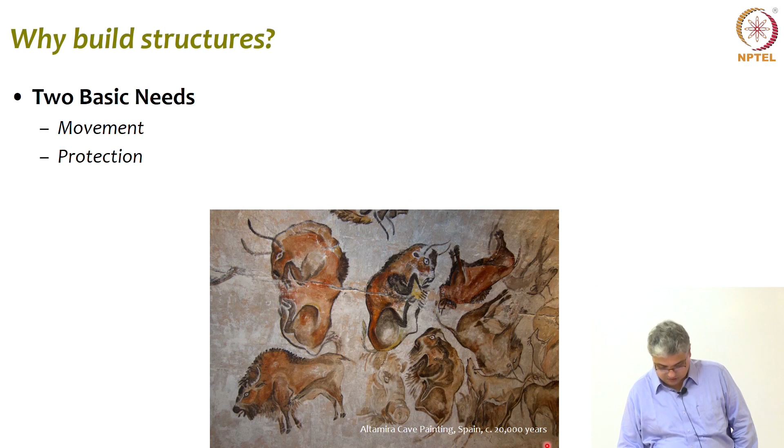So the first thing was for movement and protection. But as we progressed as a race, there were other requirements also, and we started building for different purposes. Sometimes it just boiled down to creating something so beautiful that it catches everybody's imagination and you just leave a mark. That itself is a great achievement of the human race.

We were able to do that by constructing these beautiful structures, beautiful not only in terms of the architecture of it, but also in terms of the science behind it. And we'll see why people say structural engineering is a combination of art and science.

So you just build one of these in your lifetime and you will be famous and known forever. The question is, are you willing to do that?

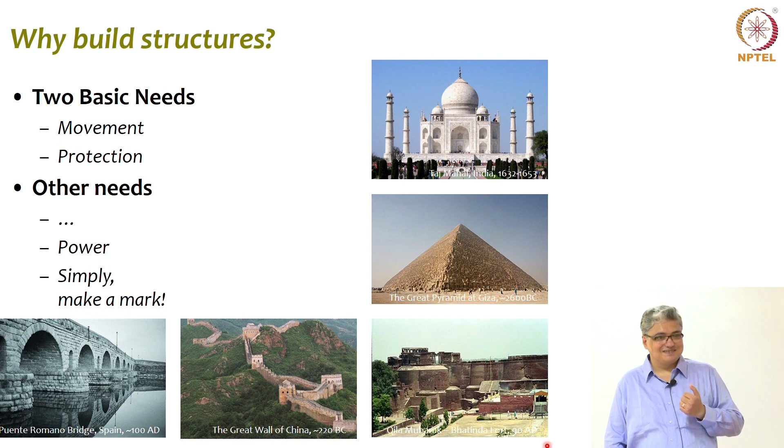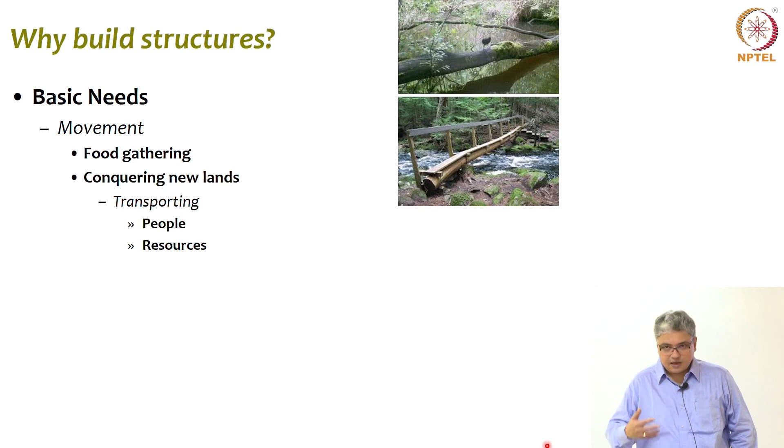If you really look at it, it's very simple. We have seen fallen logs and branches, and not only we but even other animals have used them as simple bridges. Taking inspiration from that, today we have managed to build massive, massive bridges.

So taking a clue from nature, we managed to do such massive and wonderful things. What was the whole purpose? The purpose is to come out and explore the world, to be able to move around, to move people and resources. First, the option was to hunt and get food, and slowly move to newer places looking for newer resources, which eventually led to conquering new lands for resources and for people. So movement or transportation of people and resources was important for us.

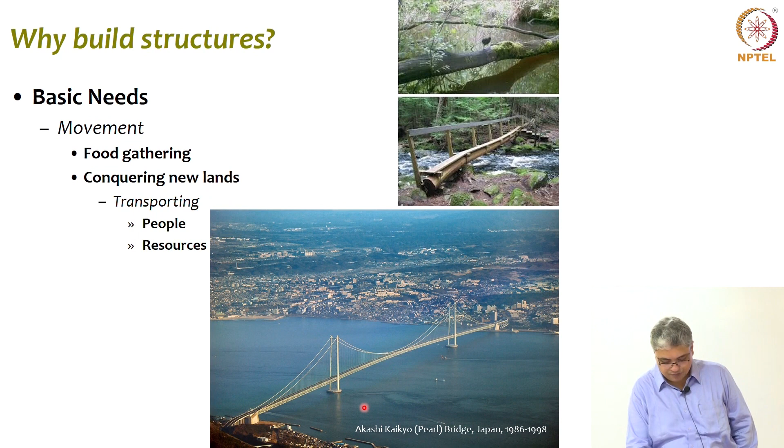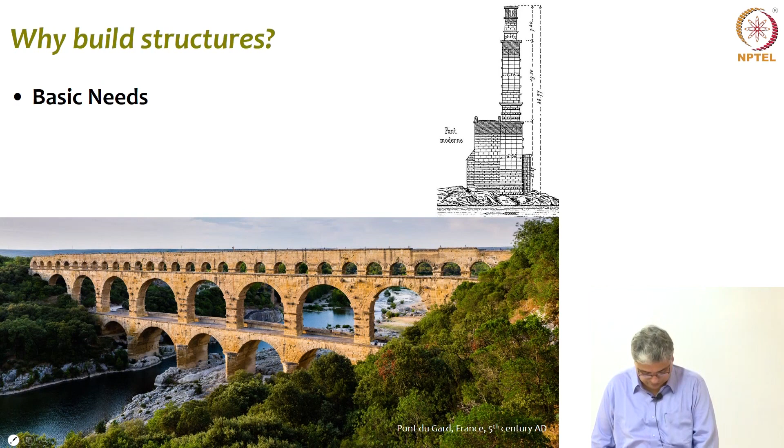Just look at this. Centuries old structures still standing, beautiful. You just look at it and feel good that we as a race have done something beautiful in this world. That feeling is also important. So another example of beautiful Roman architecture and construction.

In modern days, we took it one step forward, making aqueducts which can also support ferries. It's not just transporting water, but actually transporting people also. So what it shows is that we are slowly expanding our domain, thinking bigger and bigger, and as we do that, we are capable of executing such dreams and making them reality.

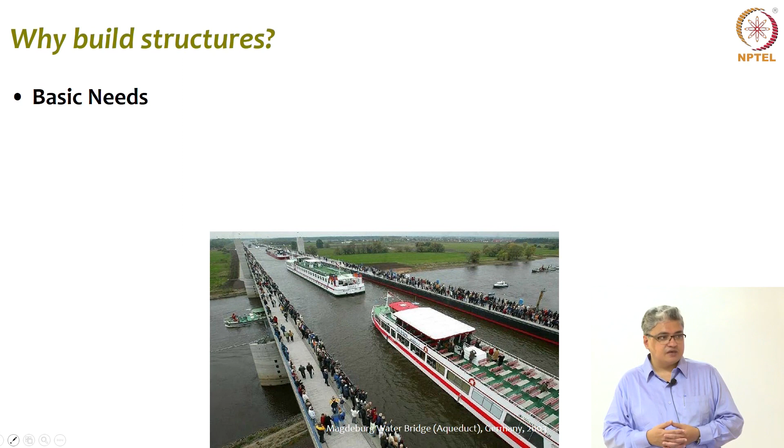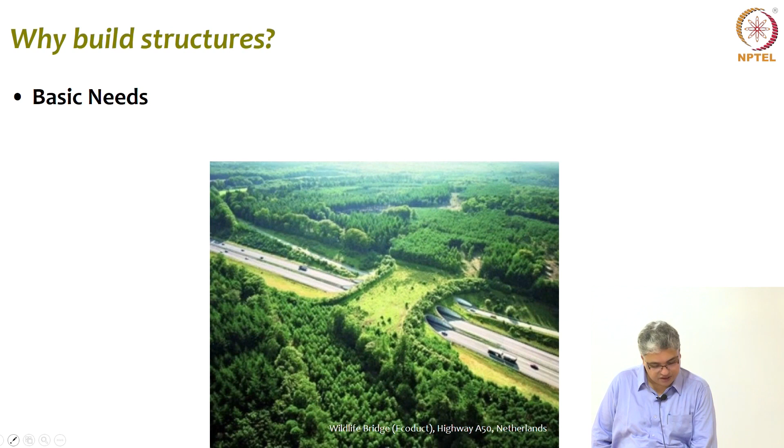Talking of protection, obviously the first thing that comes to mind is we need protection from nature, right? The natural hazards. And today, of course, we have natural as well as man-made hazards also.

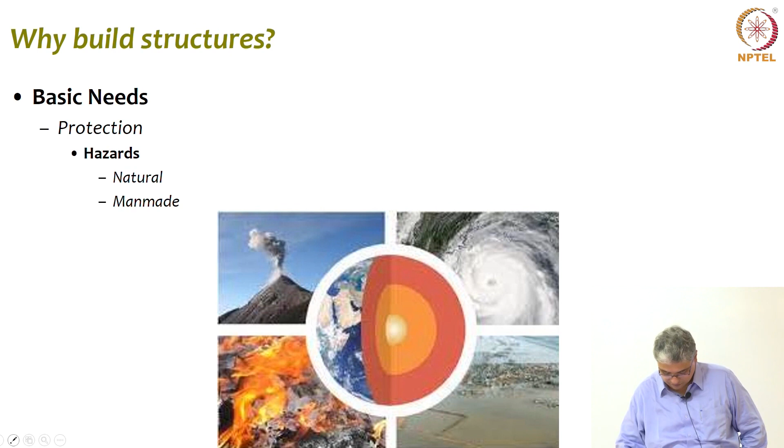So what are natural hazards? Things like floods, cyclones, earthquakes, droughts—these are natural hazards. And today we have a lot of man-made hazards too, starting from pollution to even arson and so on.

So if you really look at it, I'll touch upon some of the very important ones, which are cyclonic occurrences. You see that the whole coastline of India is actually prone to cyclones, and the eastern coast is more prone than the western coast, and we'll see some data.

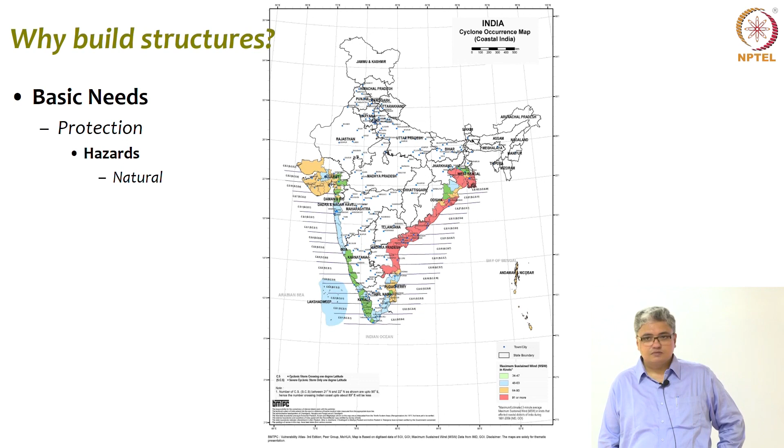So when we build structures, we have to ensure that whatever we build can withstand these natural events and protect ourselves.

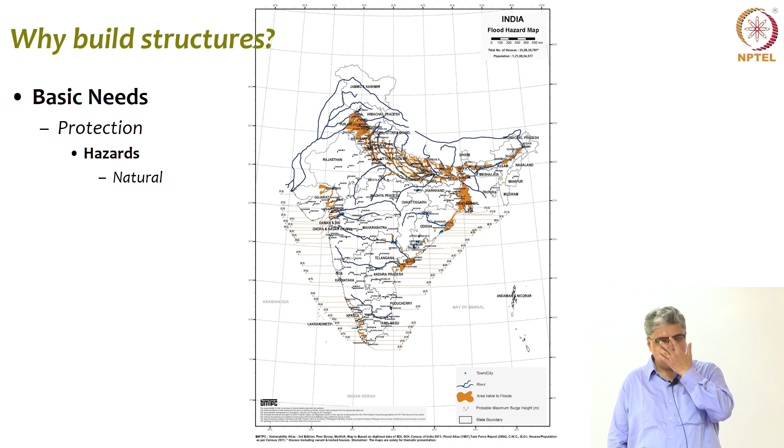Flood is another natural hazard, and every year we see these reports—on one side we see drought, and on the other side we see flood going on, and then earthquakes.

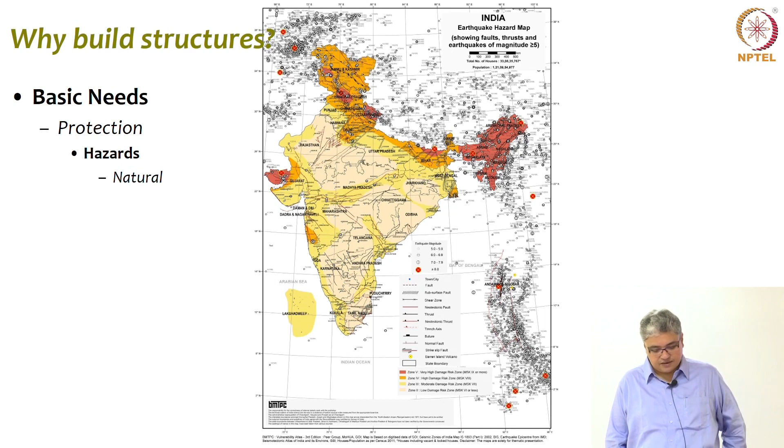So we have earthquakes occurring all over India, and particularly the whole Himalayan belt is very, very prone to earthquakes. Just to summarize this, if you visit the website of NDMA—what is NDMA?

It is the National Disaster Management Authority under the Government of India. They list out a lot of natural and man-made hazards. Just to give you an idea, India as a country has about 60% of landmass prone to earthquakes of moderate to high intensity, about 12% of land prone to floods and river erosion, and about 76% of the coastline prone to cyclones and tsunamis.

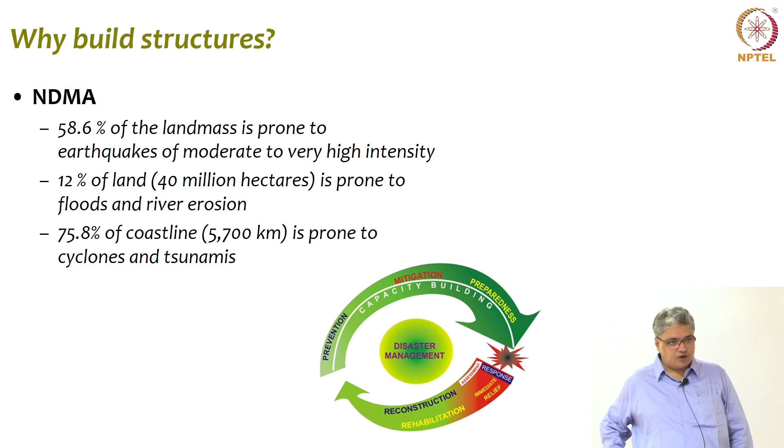So what we see is we have to do more than natural and normal things as civil engineers, as structural engineers, to ensure safety of ourselves and the structures we build in a country like India. And so we need good structural engineers—we need to understand all these effects, and then build structures accordingly.

So going back, we started housing ourselves in caves which were natural, and then we started building caves. This is a very interesting example—it's a very soft sandstone. So they said that whoever could not afford a house would go and create a burrow in this ridge and then have a house for himself and his family.

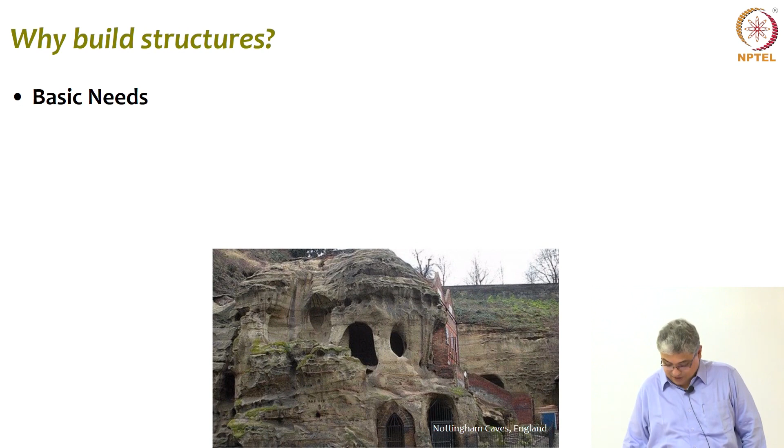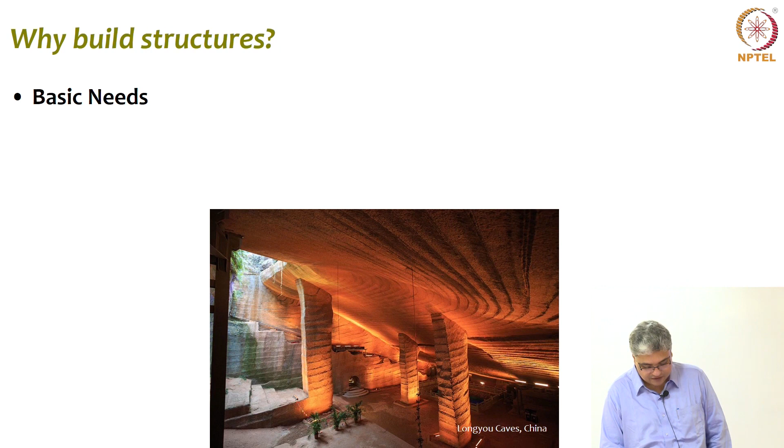But then look at this—it's a very interesting example, almost 2000-year-old, a man-made cave. So we built such things for our protection from natural hazards, and this was hidden but then found recently, discovered very, very recently.

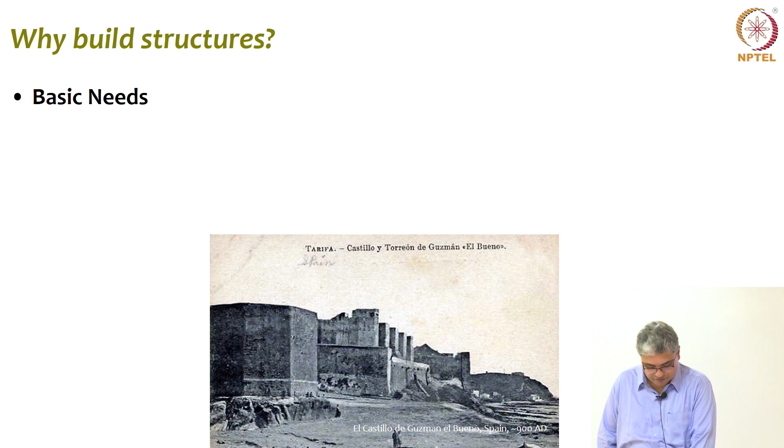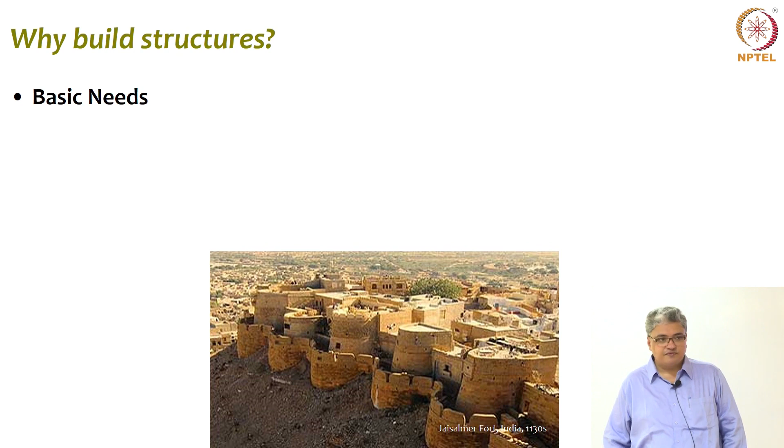So in terms of protection, in terms of building houses and all, of course we started with smaller things and then we aspired more and built more. One of the very early fortresses or forts you see back here in India is the beautiful Jaisalmer fort. Those who have visited will know—we created these very massive, beautiful structures. But then that was not all—we aspired to do more.

And there came social and cultural, and you can add religious and so on issues to it. And we build structures like this.

Not to talk about the great pyramids in Egypt, but also all over the world there are pyramids. But look at this picture. I like this picture for one simple reason: look at the creativity. The creativity that we saw in that first cave painting is still evident here. If you see here, this is the face of a serpent, and on the March equinox, the sun falls in such a way that it creates a shadow. So starting from here, you see the serpent effect, and it happens on that particular day. So structural engineering is not just building something, but it's building something beautiful also.

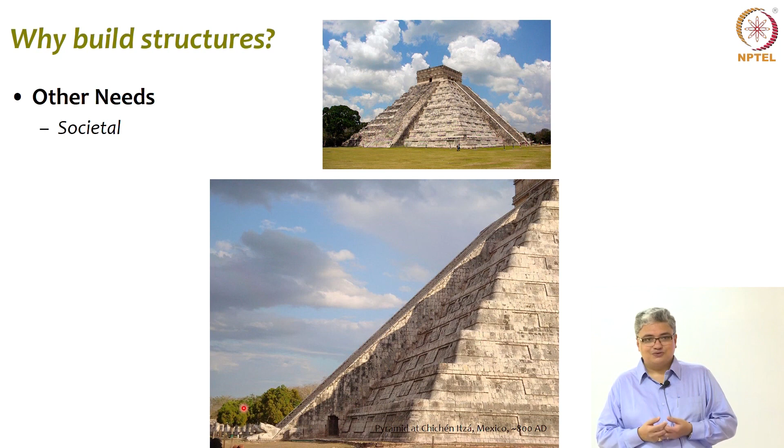So if that was built with stones, this famous temple is built by cutting away stones. It's one of the largest rock cut temples in India. Of course it took a lot of time, a lot of patience, but if you do things calmly, peacefully, all it tells us is that we can do great things.

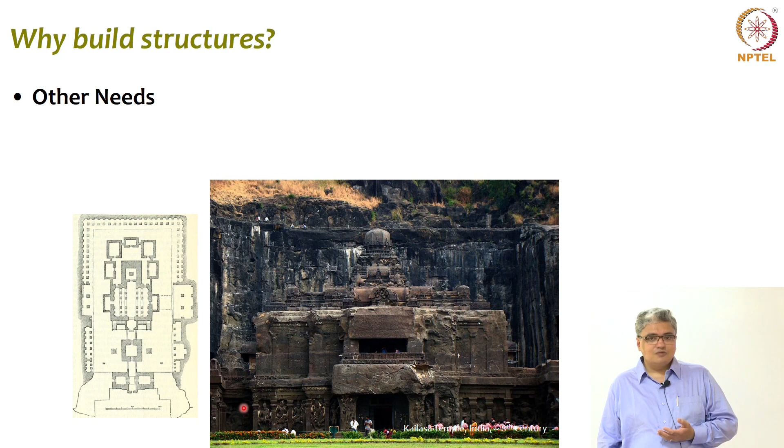One of the tallest temples in India, and when it was built, it was definitely one of the tallest in at least this part of the world. But the beauty is that they had put an 80-ton or so single stone at the top. How did they do that?

Each of these structures that I'm trying to show has a history of its own, and you can actually spend your whole lifetime studying and understanding those. But that's not the point. The point is to see and understand and appreciate that as builders, as constructors, as engineers, people, without even having these phrases or these degrees associated with them, did manage to build such beautiful, massive things. So if they could do it, we can also do it, is the belief with which we have to start.

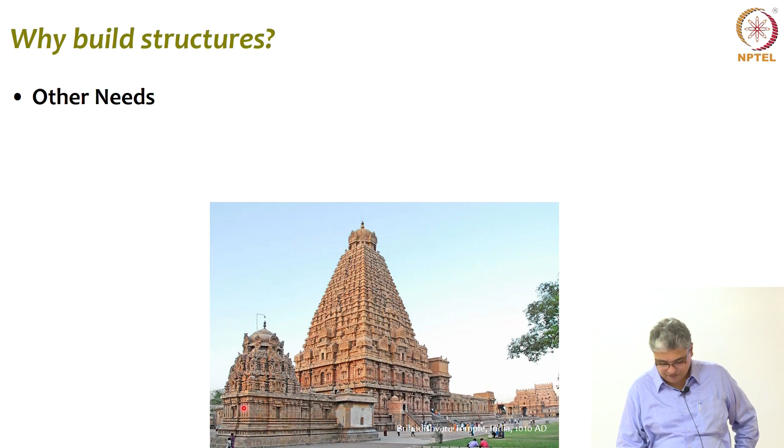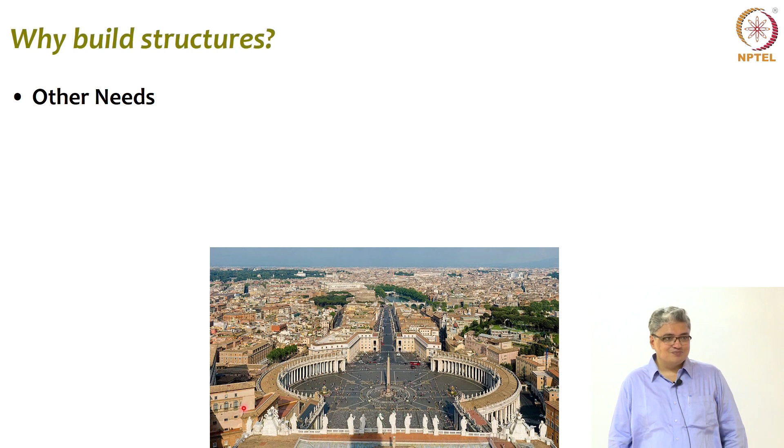With all this came another dimension to our life, which is power. This is the view of Rome from, you guessed it. But again, to have authority, you have to look powerful, you have to look bigger, greater than the common. And one of the best ways of doing that was to build something so beautiful, so exotic for yourself.

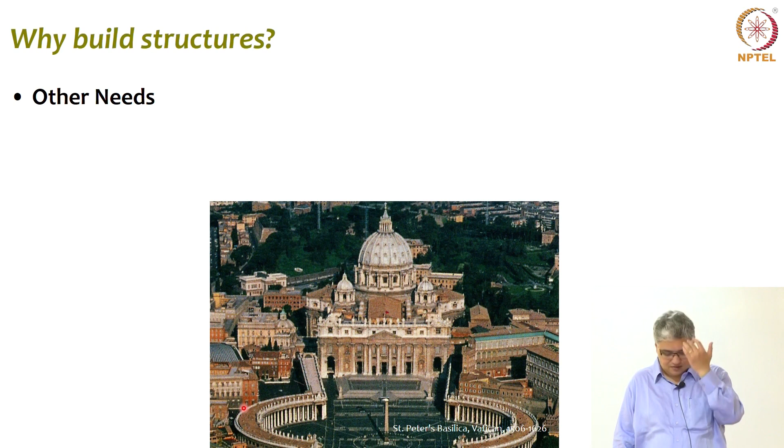And that same thing went ahead in time. All of you know the story of this. Effectively, what it tells is that we wanted to come out of those caves, explore the world, and that urge, coupled with our inherent creativity and talent, made us do all this. So we as a race are very important, and we are capable. Only thing is, we now need to take that forward.

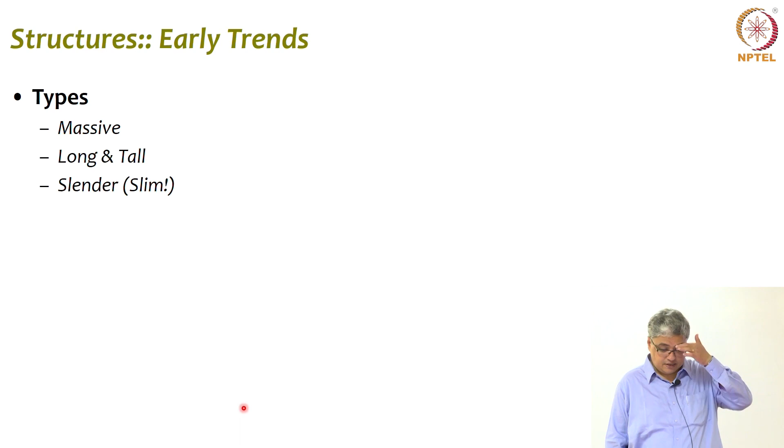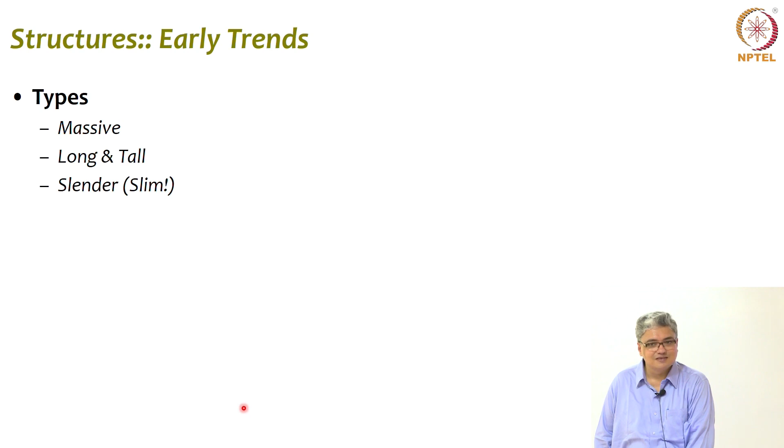So if you really look at all these things, the early trends were we build structures which are massive, awe-inspiring. But then slowly we started building long structures, tall structures, and today, of course, the buzzword is slim and fit, slender structures.

So just compare bridges. This is what we used to build earlier, and this is what we are building today. But it's not just a change of taste, but actually there is engineering involved in this, and this is what we will be understanding over the next couple of days, or I would rather say over your stay here at IIT. Why is it that we are able to build these kinds of structures that you see on the right today, which we did not build earlier?

It is because of our understanding, because of materials, our understanding of how structures behave, our capability of analyzing structures and designing structures, and so on. And those are the items we will be discussing later.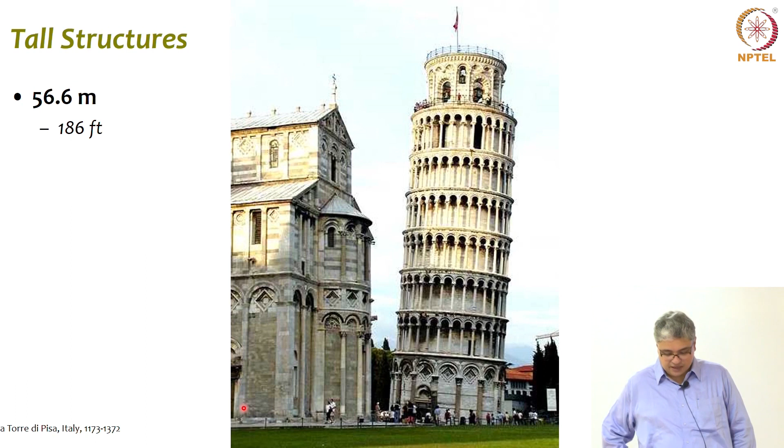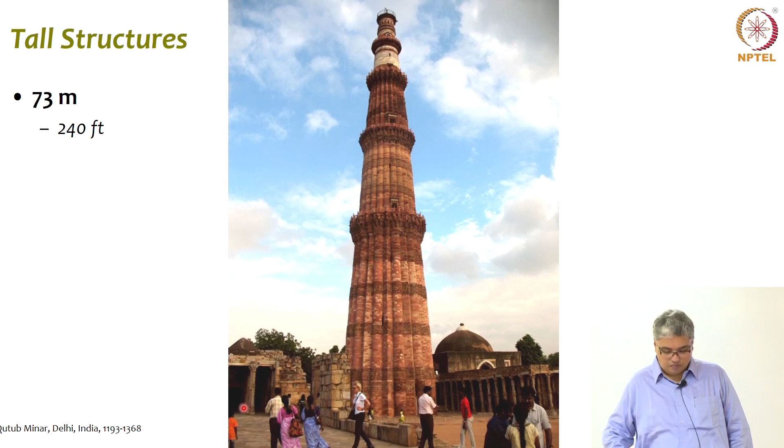And then in our own country we have this structure which is more than 70 meters tall, and then suddenly you see a quantum jump. Now, if you follow the construction, the material, you see that there is a sudden change now.

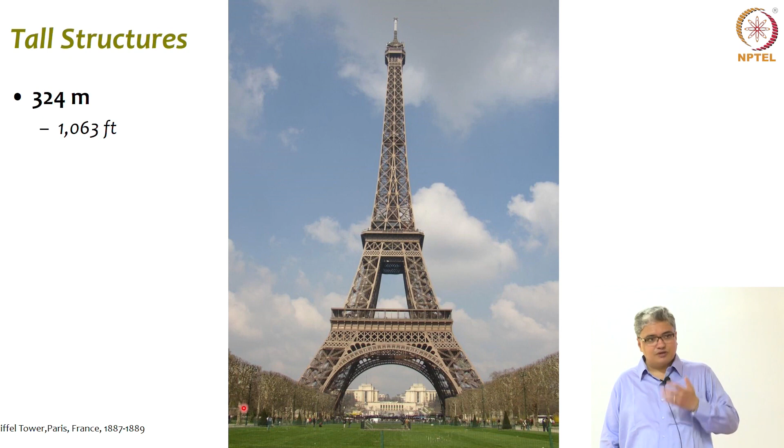It is possible, it was possible to build this because of something that happened in between, and we will discuss that later. So suddenly we have moved up to this, and this whole thing gave that idea that it's not just we want to create a structure where once in a while we can go up and then see, but actually we want to build buildings which will be tall, and so we want to live up there.

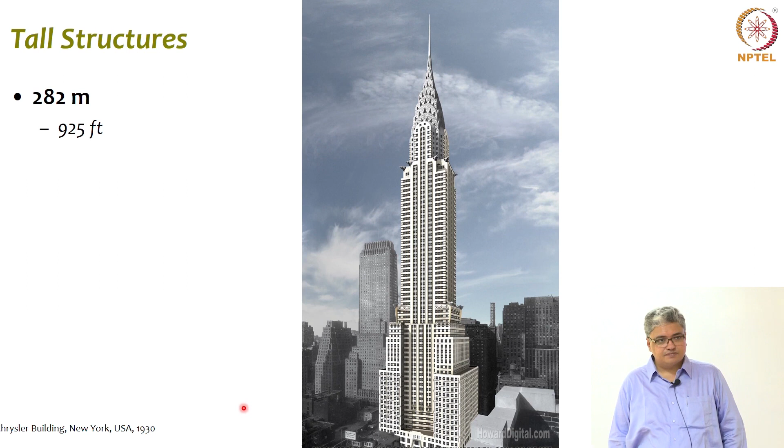So, a very famous building, less than 300 meters tall, and in those days, just imagine, it was all built - I mean, you did not have, today you carry a smartphone which is a supercomputer.

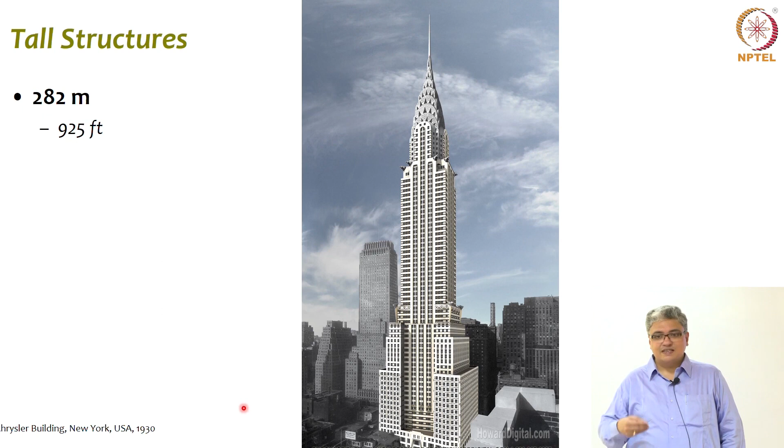And we will see in structural engineering we will need physics, we will need mathematics, and so on and so forth. They managed to build this structure, and that actually created a race.

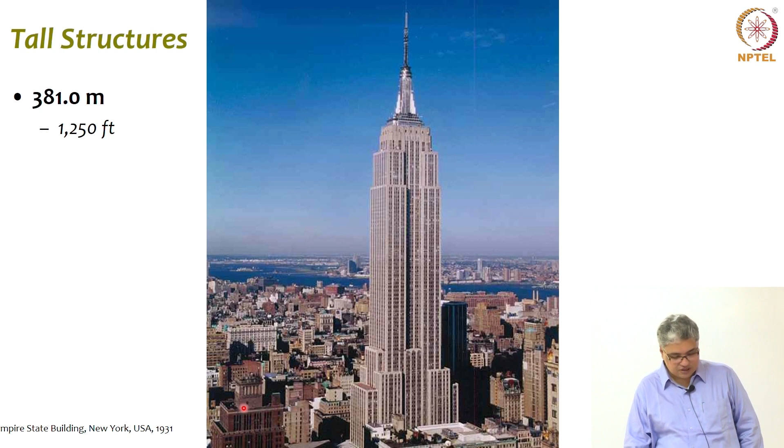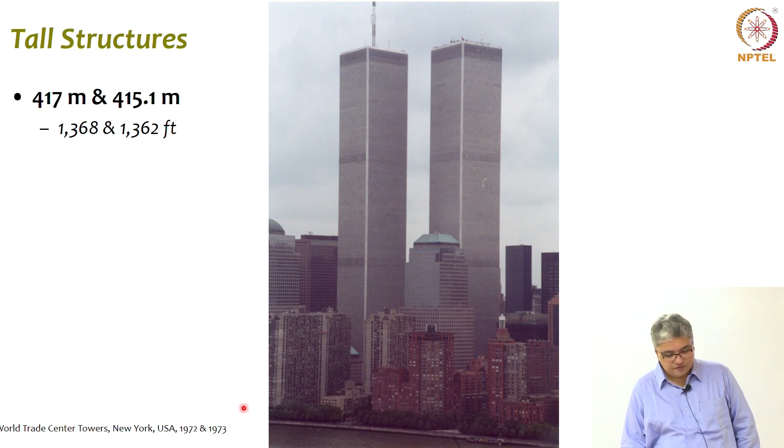Everybody had to build a taller structure than the previous one, and so suddenly we got into this, we had this beautiful Empire State Building, and then we had these two, right? But still about 400, 450, 500. So what we see is that it was simple to move to a certain level, and then it is becoming difficult and difficult to go up.

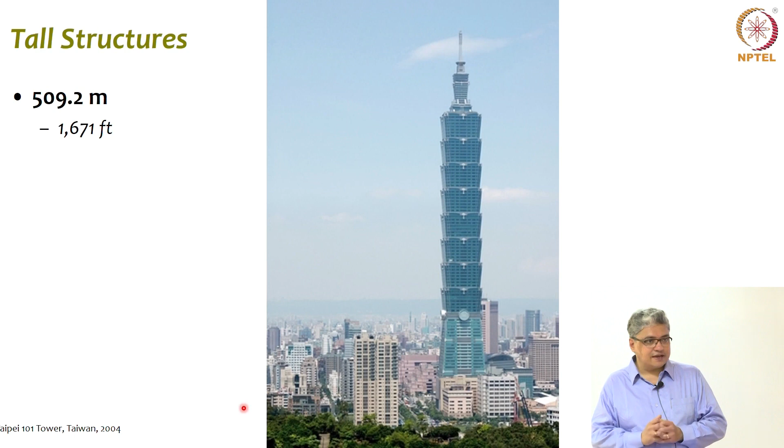But each one of these tall buildings that we saw actually has a beautiful but simple structural engineering concept behind it, and we will discuss those later. But we have reached here, and of course, this is again a quantum jump.

This is again a very, very quantum jump, but we are not satisfied. What is it that we are building? We realize that we have still not been able to bridge the 1 kilometer mark. We saw that bridge span nearly 2 kilometers. Now we are trying to go up, and we are struggling to go up 1 kilometer.

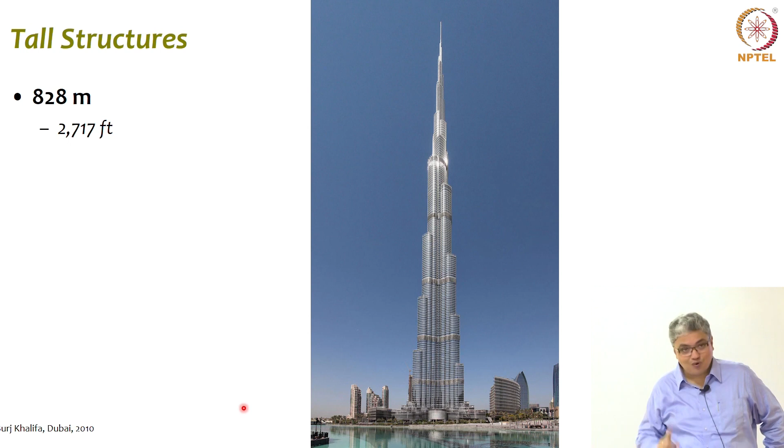So the original idea was to have a 1 mile tall building, but then it came down to 1 kilometer, and that is what we are targeting. Of course, within this time frame, many more tall buildings, super skyscrapers have been built. Particularly China is going very aggressively towards building these super tall buildings, and they have developed the capability, so they are doing it. Others are also trying to do it. The forecast is that by 2020, this is what we are trying to achieve.

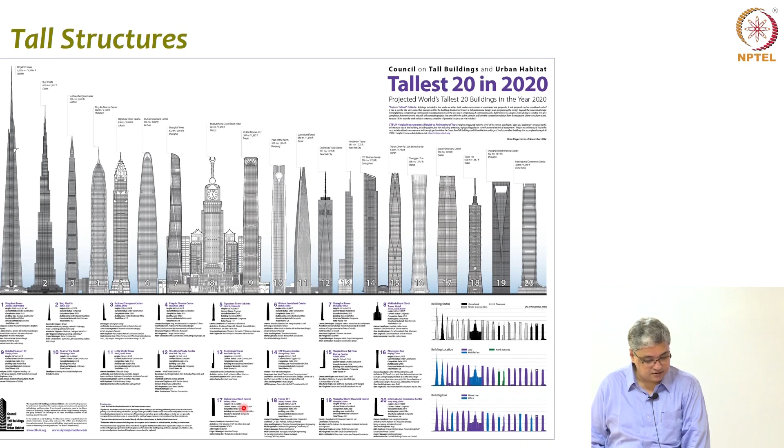So the point is, imagine you are able to build a structure 1 kilometer tall. It's a massive achievement in terms of building. But having it tall is one part of it. As engineers, we would like to look at it in a slightly different way.

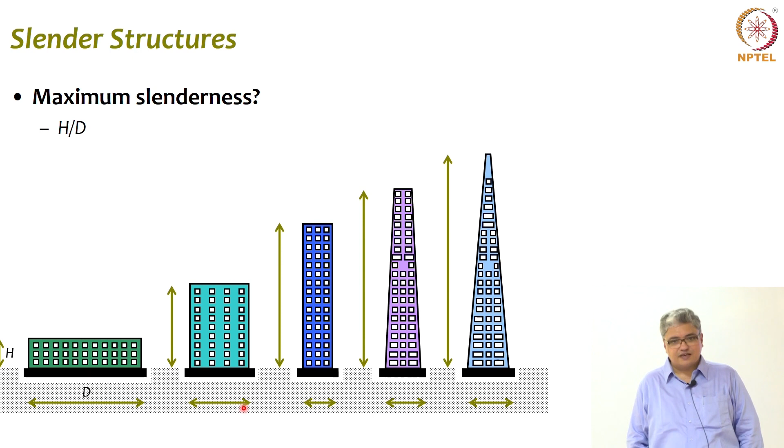So we want to look at it in terms of a ratio, slenderness. What is it? Height to width ratio, or depth, or length, whatever you call it. So if you look at this, what is that ratio? And if we have to draw a graph of all these tall buildings, their height divided by their width, how does that graph look like? Take this up as a nice cute exercise and try to come up with this.

So as the number of stories increase, typically if you take these buildings as examples, you have got the heights, go and find the widths, the base dimensions, and see how that varies. Is it a linear variation? Is it this variation, or is it this variation? What is it? Go and figure out. It's a very interesting thing. You will realize that in terms of structural engineering, we are reaching somewhere. And what is that?

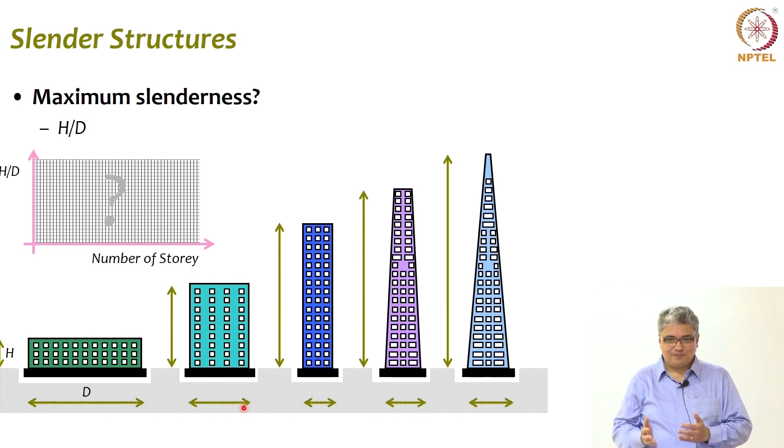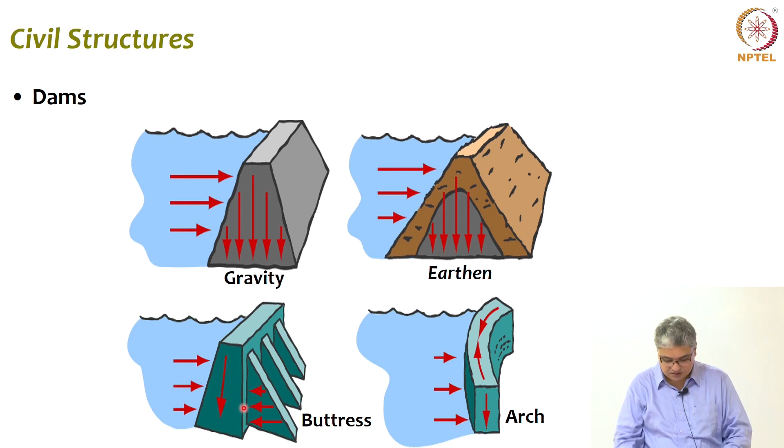Then of course, in terms of transportation, another important field of civil engineering, we had this golden quadrilateral, then we had the north-south corridor, we have the east-west corridor, and now we are taking it one step forward. Two things are happening: we need to create lots of bridges, and at the same time we realize that we have lots of old bridges. They are very old.

So we need to preserve old structures. We have work on two fronts: create new bridges and new structures, and preserve old structures. For both of these tasks, we need very trained, qualified civil engineers.

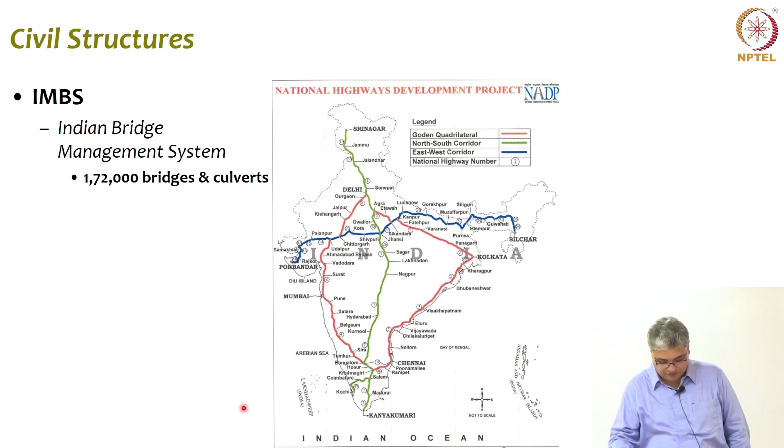We aspire to do more. That's the only thing I can keep on repeating.

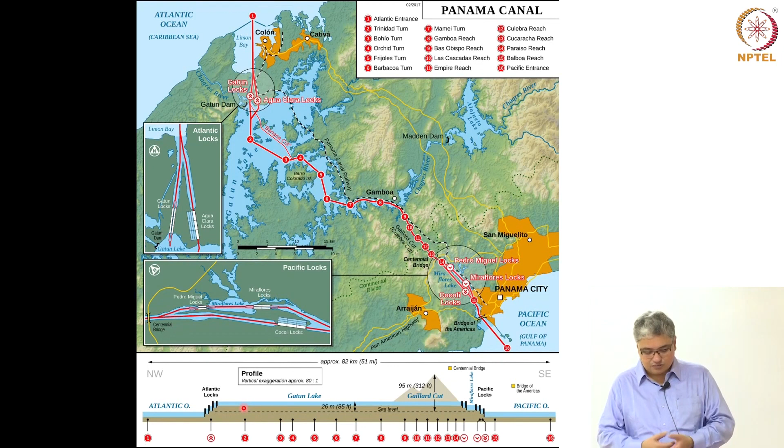One of the landmarks of 19th century civil engineering: the Panama and Suez canals, connecting the Atlantic Ocean with the Pacific Ocean for Panama, and then the Suez Canal. All of these projects require a lot of multidisciplinary work, in the sense that civil engineering in itself is a huge multidisciplinary area. You have geotechnical engineering, water resource engineering, hydraulics engineering, civil structural engineering, transportation engineering, all of them come together to create things like this, which serve.

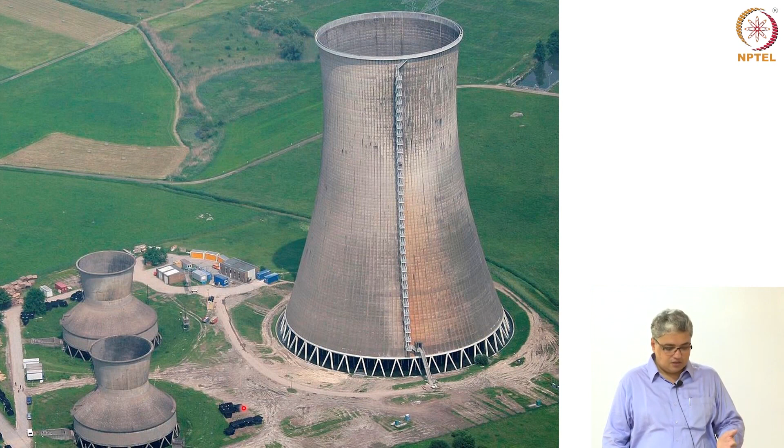Once again, look at the size. This is a cooling tower. Just look at the sheer size of it. We have built such things. Today, for clean energy, we are going to build a lot of nuclear structures, power plants, so we are going to build a lot of these structures. Energy sufficiency is an important thing today.

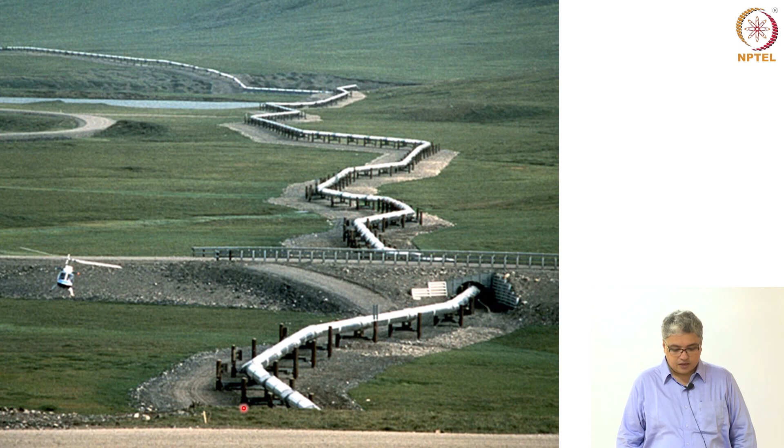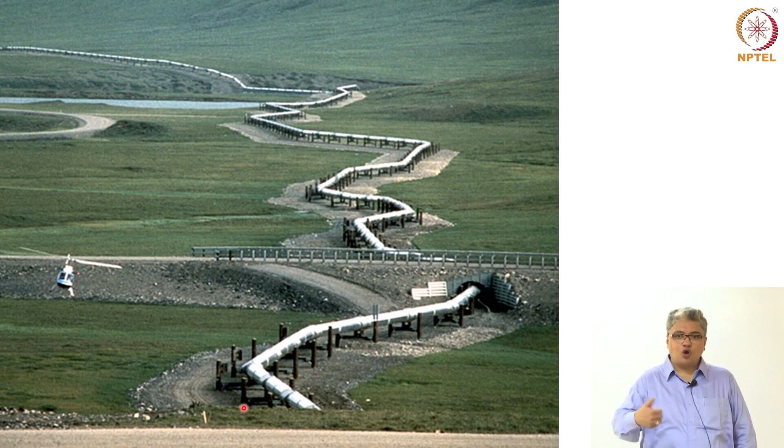What you see here is a very interesting project, the Trans-Alaska Pipeline, built to transport oil and fuel. For this, engineers had to do a very unique innovation. Here is a pipeline, and if you see it, it's all bent and crooked. You must be wondering why it's like that. It is supported on something sitting on rails. This is because it crosses an active seismic fault, and the earth moves during an earthquake. If you create one stiff pipeline across it, that pipeline will break. So you create these segmented pipelines with flexible joints supported on rails, so that no matter how the earth moves or shakes, the pipeline stays intact.

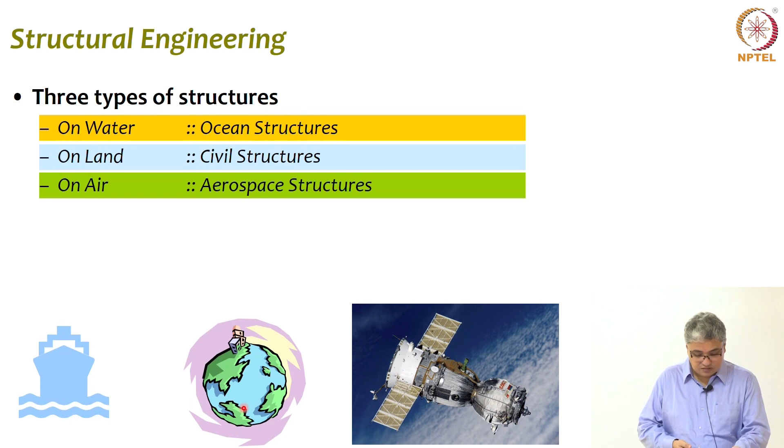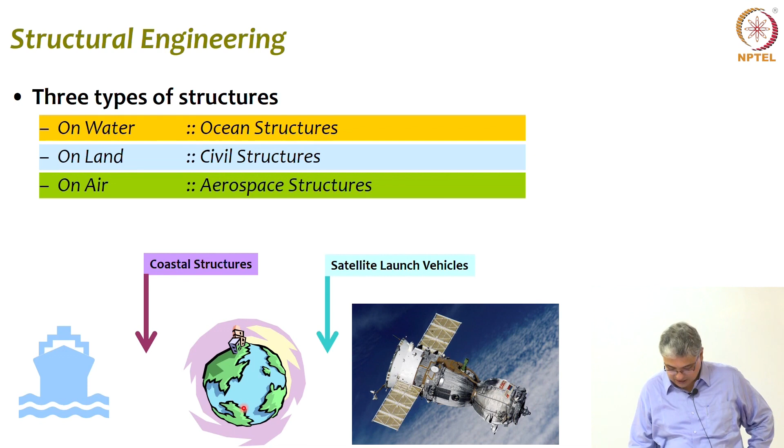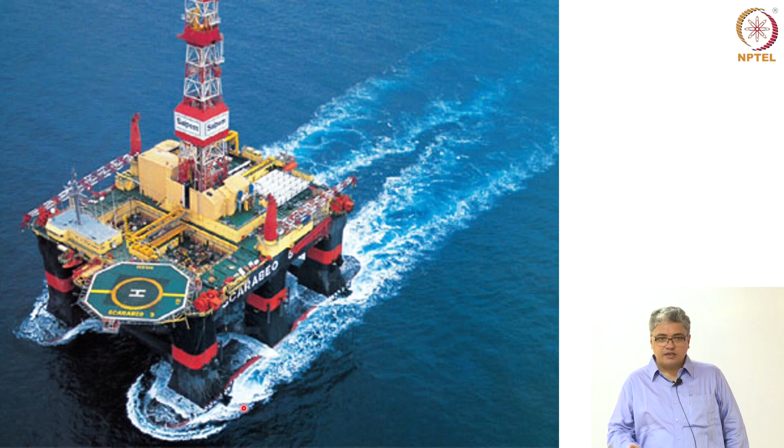So we have structures which are on water, on land, on air, and we generally as civil engineers talk of those structures which are on land, and then we have the ocean engineering structures, and then we have systems which are in between, where the principles of structural engineering, hydraulics engineering, and geotechnical engineering are all required to make things work. Just look at this: it has to withstand strong wind, it has to withstand ocean currents, it has to support people working there, and so on, and do its function.

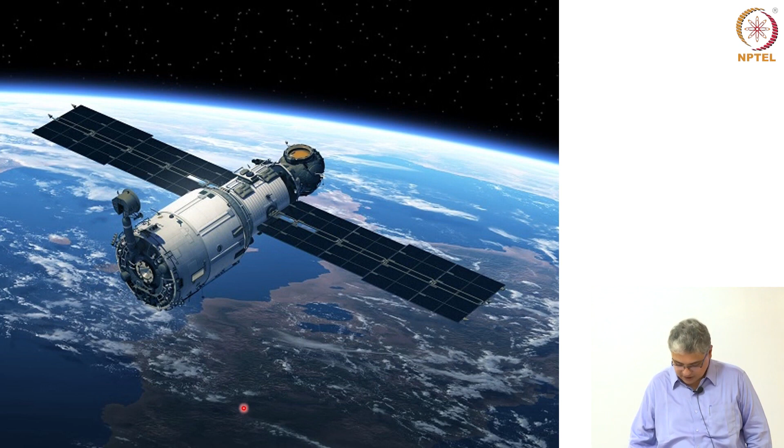So they have to be designed. They have to be produced, built in such a way that it performs the intended purpose. And even here, you will be able to use the principles of structural engineering, mechanics, and so on and so forth that you will be studying over your stay here, to understand how these behave.

But if you look at engineering as such, it all started with civil engineering in some form or other, right? If you go and look at all the old universities around the world, you will see civil engineering was there right from their beginning. In fact, civil engineering was there right from the beginning of mankind, as I said, and tried to impress upon it. Then of course mining was another important discipline of engineering which helped human race to progress. Metallurgy, mechanical, chemical, electronics, electrical, ocean, aerospace, and today we are at a stage where we can specialize and super specialize on small areas. But civil engineering still remains one of those very, very broad discipline of engineering.

Where as a civil engineer, you will be learning, you will be discussing so many variety of things, like starting with geology. Why is it important? You cannot build anything on earth which is standing on earth without knowing what is below, right? Without a geotechnical engineer friend, you cannot build a structure. You have to know that. So, and before that you start with hydrology.

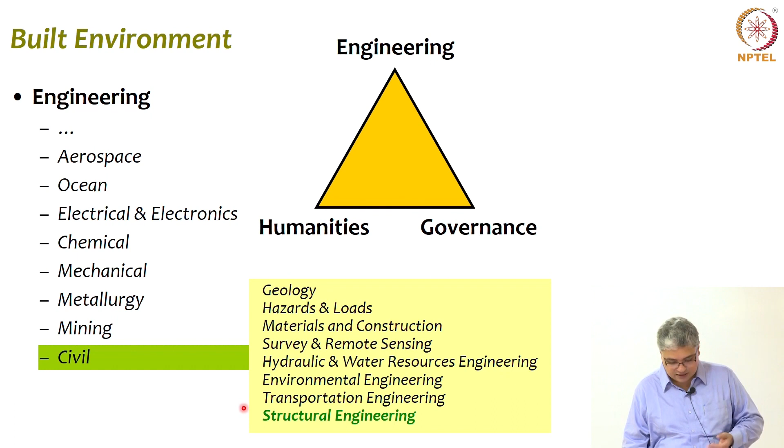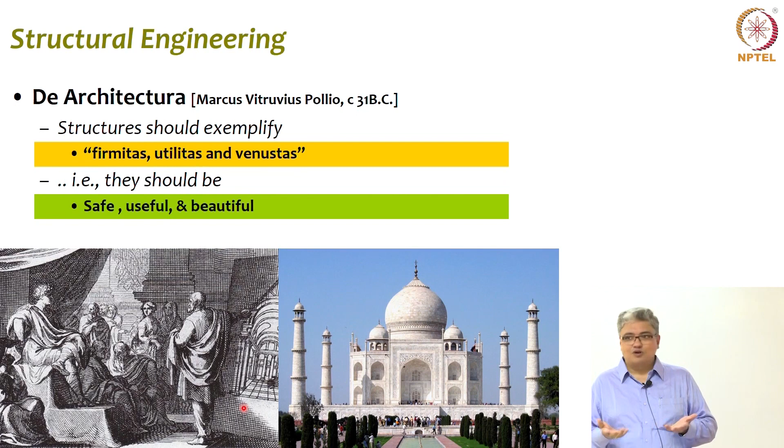So talking of structural engineering, one of the earliest things that was said is that a structure, I asked you to write down what you think a structure is right at the beginning, and it has to get improved over time. But what they say is, you must build something, a structure must be something that is safe, very important, useful, and beautiful. So if you now think back of all the photographs and structures that you have seen, first of all, they had to be safe. That means they are thousands of years old, they are still standing, they have not fallen on somebody, right? And they served a purpose, whatever that purpose is, whether it is for movement, for protection, for social reasons, for political reason, doesn't matter, it served its purpose. And most important of all, I mean, in a way, they're all beautiful.

But today, safety, functionality, aesthetics are important, but we are dealing with a situation where we have to explicitly talk about durability. What we see is that those structures which are thousands of years old are still standing, but some of our recent structures are not really continuing to stand. So there must be some reason, something that on our way, on our journey, we are probably beginning to not do right. And so we need to understand that and then pay attention to this aspect also.

And most important thing that is happening today is that today none of us are pharaohs or emperors having unlimited land, unlimited resources and all. So economy is an important aspect of modern day civil engineering. You have to build structures within a constrained budget, and more importantly within a constrained timeline. You can't take one century to build a structure, although there are structures which are even going like that. So durability and economy are also going to be important facets, tenets of structural engineering, that as a student of structural engineering or civil engineering you will have to understand and appreciate and then act accordingly.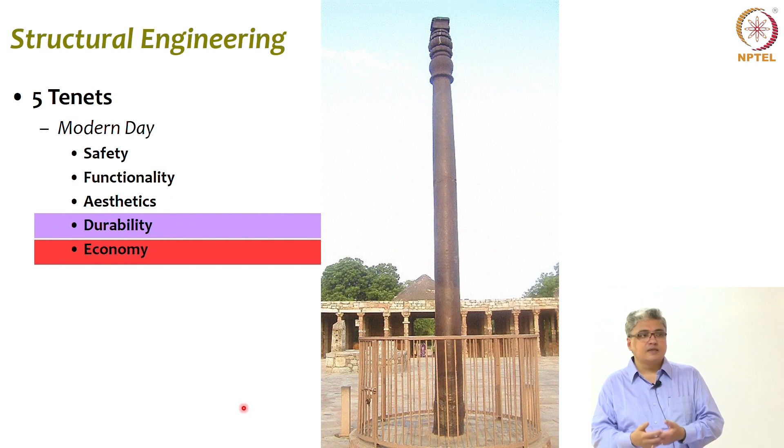But safety is of paramount importance. If the structure is not safe, it's going to collapse, it's going to fall down, it's going to kill people. Not acceptable, right? And this is where...

Your science, your physics, your mathematics all comes into picture, right? We need to understand how forces act on the structure and how a set of forces is said to be in equilibrium for a structure to be safe. We need to understand compatibility of deformations, and we need to understand how materials behave, how members behave, how structures behave. So these are the scientific part of structural engineering that you will be learning as you move along. Only then you will be able to ensure that you have built a structure which is not only beautiful, not only useful, but safe.

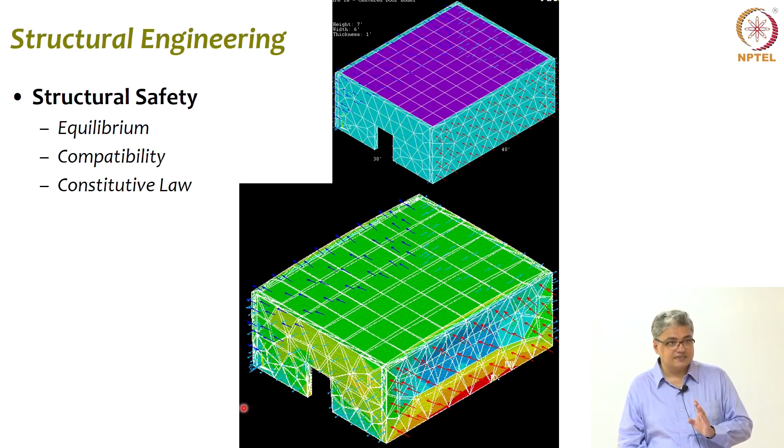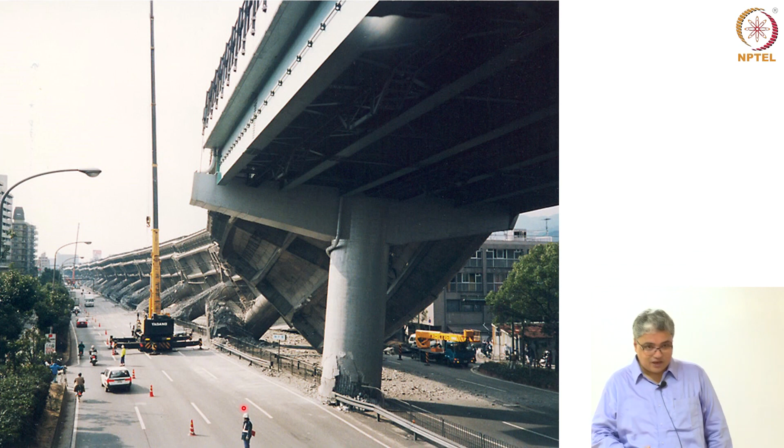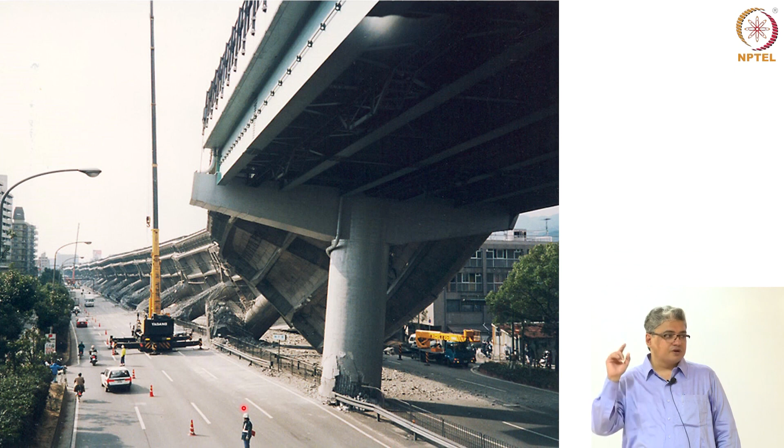But I said anyway, our job is to build structures to protect them and us against those natural hazards. So we have to do that, we have to learn. But then, as they say, it's okay, we should learn from our mistakes. And that is another very important aspect of engineering.

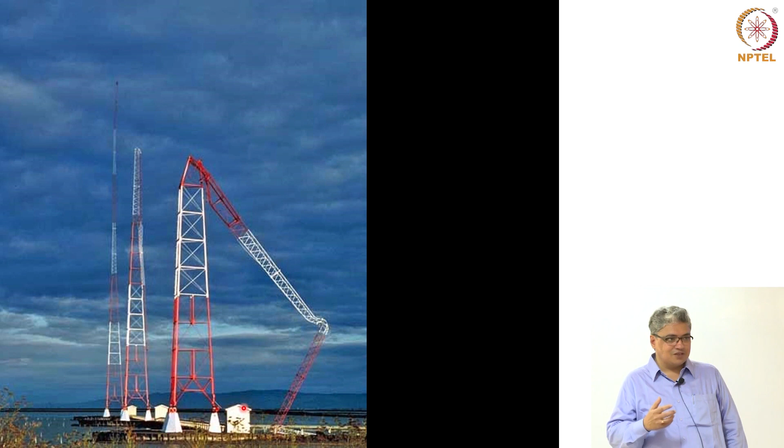We have never done it right the first time, but we have learned from it and moved forward, and that is why we have been able to progress, we have been able to do what we have done. So the important thing is to let go of your ego and say, okay, we have done something wrong and we will do it right the next time around.

This is where comes an important part, which is, as a structural engineer, you will have to feel, you have to understand how structures behave. And this is almost like psychiatry, that you understand how a person is behaving. You go inside the mind of a structure and understand how it's going to behave.

Now, this may sound very weird to you today, that's absolutely fine. But this is precisely what a good structural engineer will do. He will look at a structure and understand what is happening in the structure. Just like a good doctor will look at the patient and say, okay, I understand, I know what you're going through, right? Diagnosis, same thing a good structural engineer will do.

And the whole training is about training you to see a structure and understand how it is behaving, what is going on within the structure, and that's why you are here for the next few years. And that's the whole thing.

And so to be able to understand how structures behave, we will understand how materials behave. We saw different materials, we'll see how each one of them behaves. We will understand structural systems. You saw different systems without me explicitly telling or pointing out. You saw different structural systems, which we'll discuss again next time around.

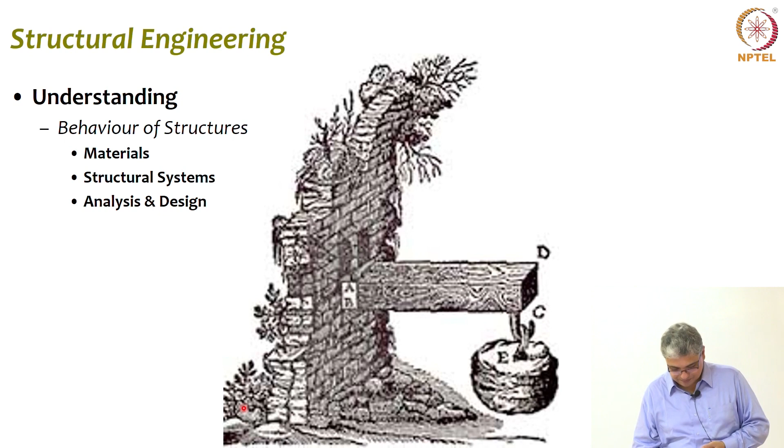But for all of that to be done, or for you to be able to do, you need to start off with a very creative mind. Trust me, it's not just that some question is given, you do that. Civil engineering is very creative, as you have already seen.

So you need to keep that alive in you, but at the same time you need to have a very scientific mind. I know all of you are good, you loved your physics, you loved your mathematics, you loved your chemistry. Continue to love physics, chemistry, mathematics, all that, and you will be a good engineer. But you need to continue to love them. So first year, all the courses that you are doing, you need to continue to love them.

But the important thing is to be motivated and to be disciplined, right? All forms of engineering, I'm not talking about structural engineering here. It's important that you continue to be motivated, and motivation, the first motivation has to come from within. If you find it lacking there, come across, there are enough people in this institute who will help you, but you have to come across and say, we need motivation, we will get motivation. But you have to be disciplined. That is something that you have to work on. Nobody else can do that.

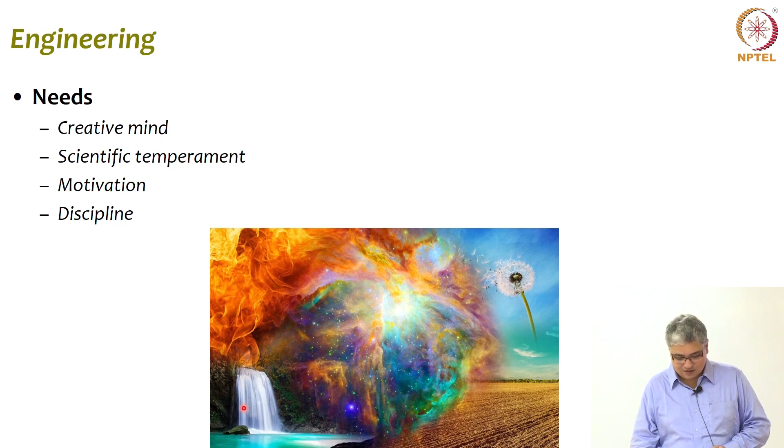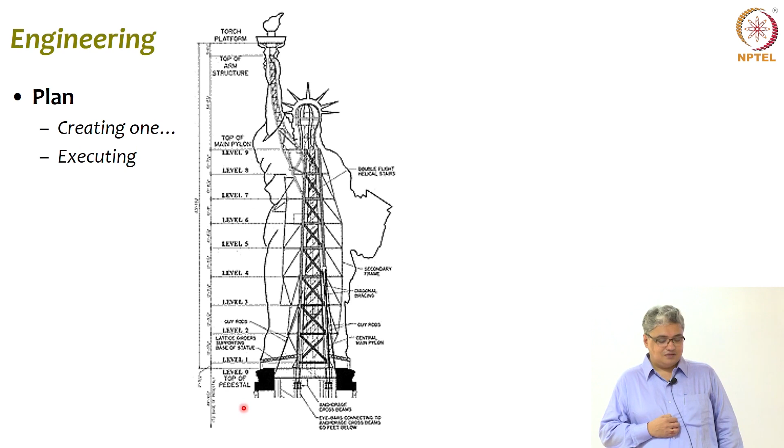And if you are able to manage all that, you need to dream first, right? And then make that dream happen. And that is what engineering is all about. And you have to first create a plan and then find ways to execute that plan.

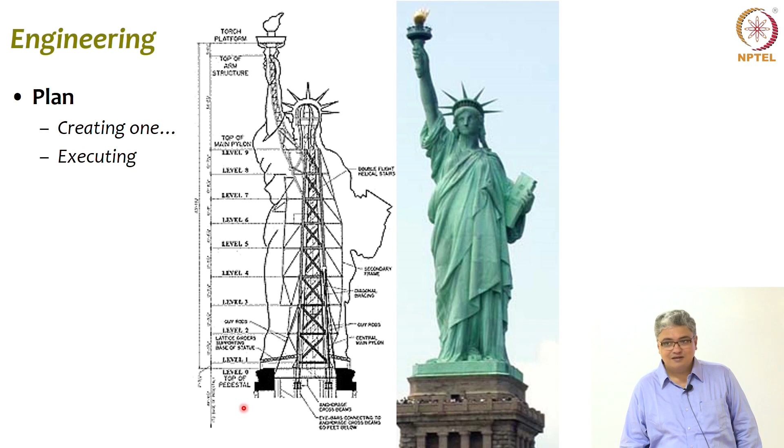And I show this picture because I also taught engineering drawing, and I don't know if you as a batch are doing engineering drawing or not. Take that very, very seriously. Take it very seriously, because that is where your creativity starts, and then if you get that right, you will be able to do many beautiful things.